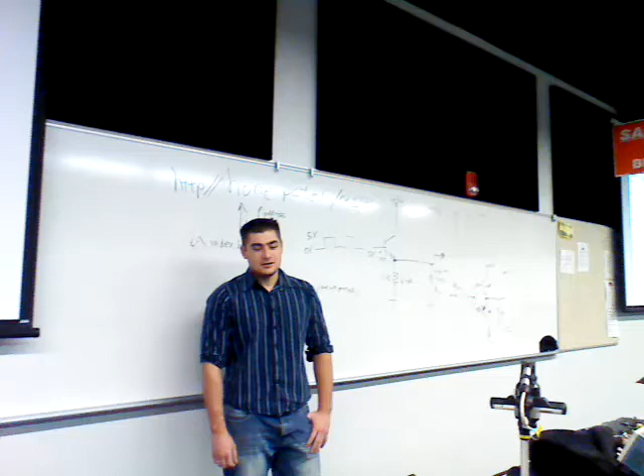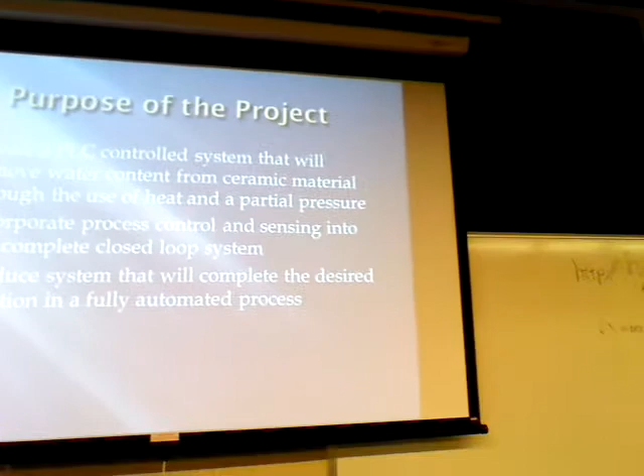For my project, I'm doing thermal assisted water evaporation using a vacuum. It sounds really complex, but basically it's just a drying oven for ceramics. A lot of processes nowadays are automated, so this takes a wet ceramic product, puts it in this oven, brings it down to a pressure of a vacuum, like a rough vacuum, and removes any content of moisture from it.

What's going to make this project actually relevant to electronics is that I'm going to be doing this whole thing with process control.

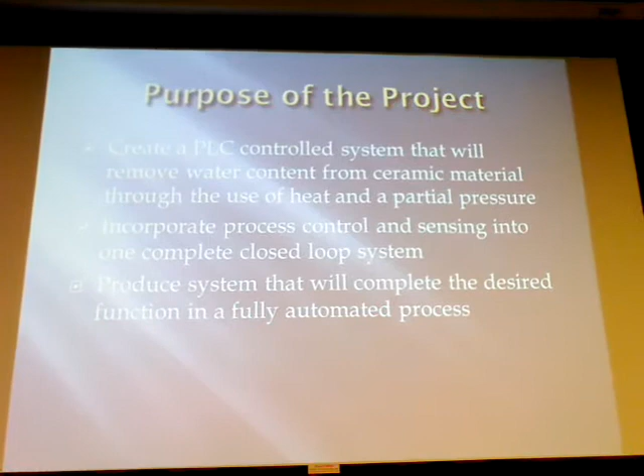Basically, you take the entire system and use what's called a PLC. If you've ever been to a robotics lab, you'll see them everywhere, and they're used a lot nowadays. You program this thing and allow the user to choose set points: I want it to go this hot, I want it to stay on for this long, and I want this much gas to flow in. The user can pick all this from a nice screen called an HMI, Human Machine Interface.

After X amount of hours, days, or weeks, it comes out, and hopefully your product is great.

This is kind of like a block diagram. For those of you who don't know, block diagrams are very helpful for people to visually understand what you're doing. You're going to be doing a lot of these for Mr. West's class.

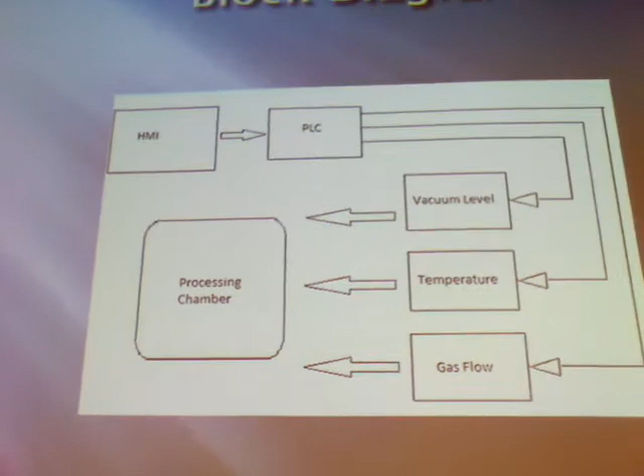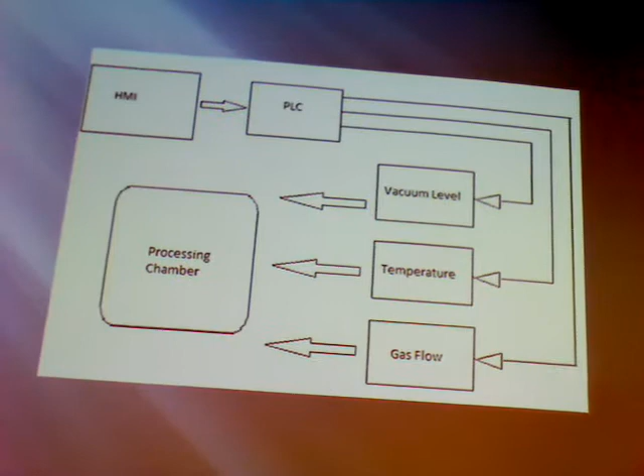Over here, we basically have the HMIs with human interfaces, touchscreen, push buttons, whatever, and then it goes to the PLC. The PLC reads those inputs and makes decisions based on logic inside, then controls those 3 variables: vacuum level, temperature, and gas flow, which all directly impact what's going on inside the process chamber.

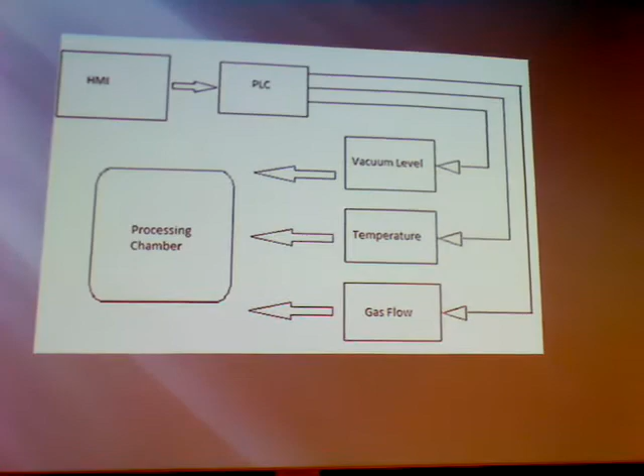So this is all kind of multiple subsystems, but they're all related into one giant thing.

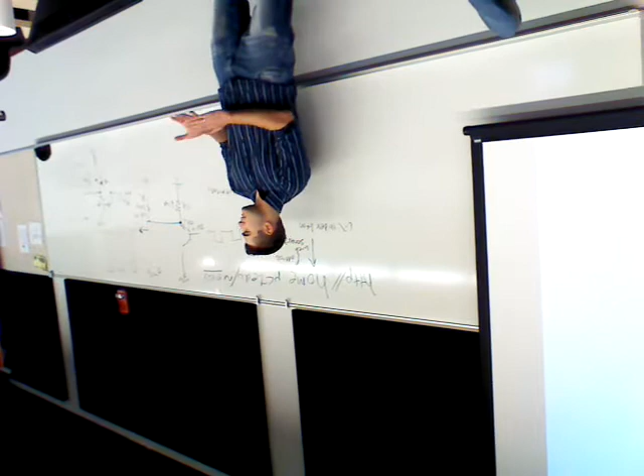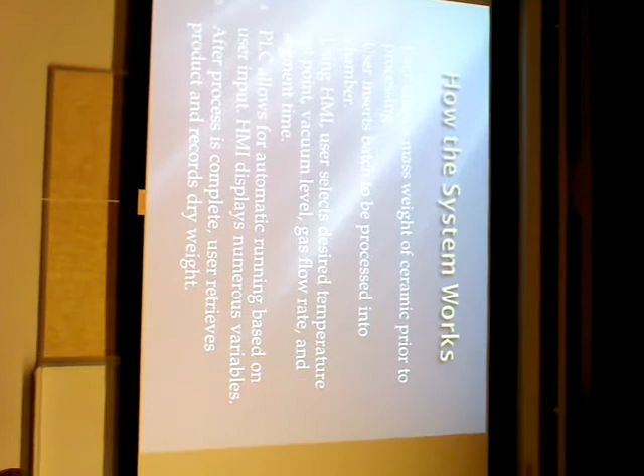So basically how it works: it's set up like, put something in. Then the user selects a recipe, what they want to do with temperature, time, gas flow, ramp rate, that kind of stuff. Then the PLC takes all that data, the user hits start, and it does it.

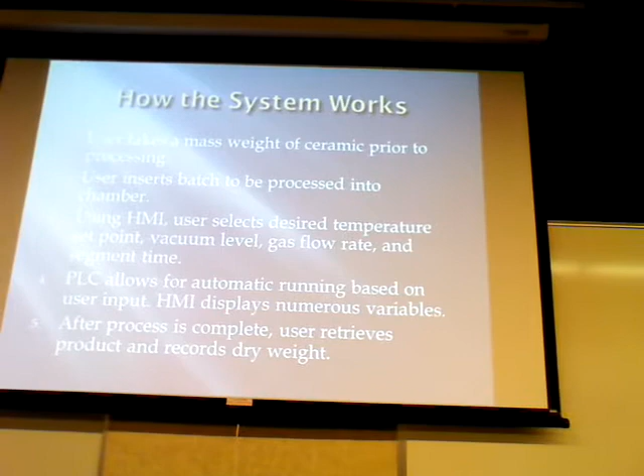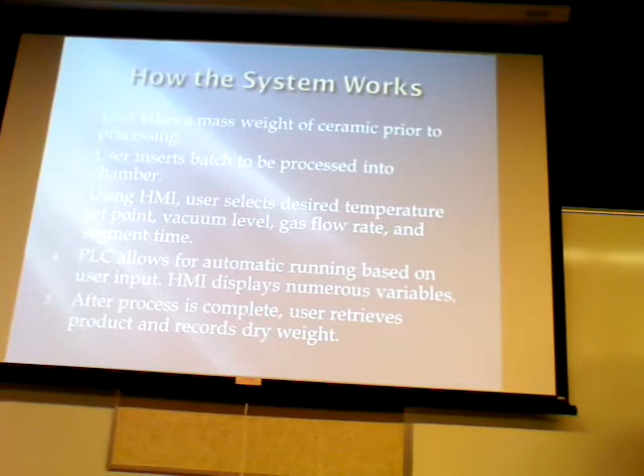After it's complete, the way I check if the water has been taken care of is I take a reading on a mass scale. You can see the weight there, and the released weight was obviously from the water that was in it and is no longer there.

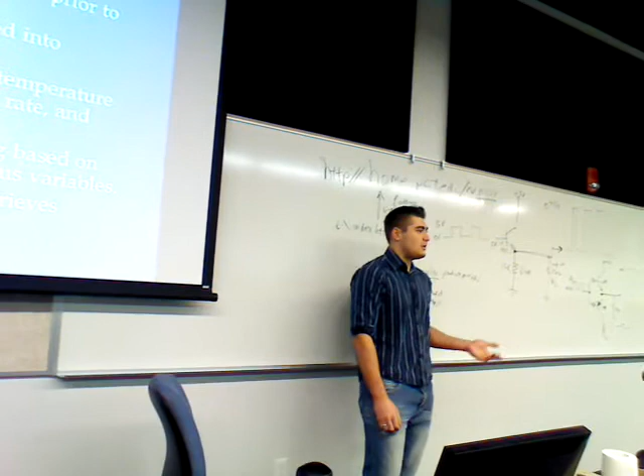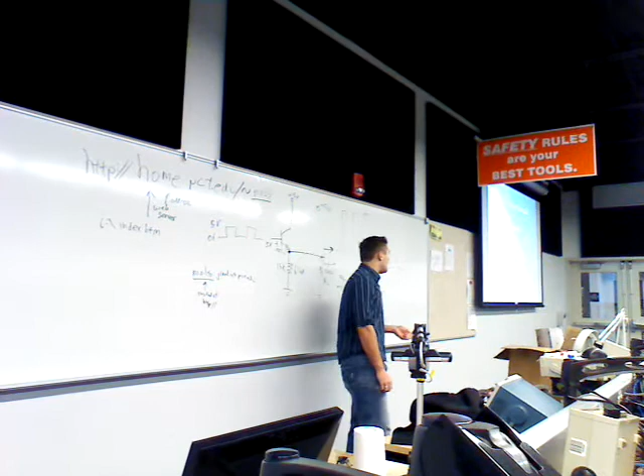I don't know if he's told you about the capstone semester, but it's something you guys kind of got here late for. It used to be a 2-year degree, called nanofabrication. They would send you to Penn State after your first 2 years here, and you would learn how they actually make the physical chips, like microprocessor chips, on substrates. It's very interesting stuff. It deals a lot with vacuum. It's on the nano level, so it's extremely small, and you use a lot of the most modern instrumentation.

You learn a great deal about many fields, like material science, biology, chemistry, and the stuff you learn there really makes you understand how much we can do with our material.

Yeah, you were there 2 summers ago, right? Down at Penn State. Basically they send you there for the summer, you go there, stay in the dorms, and go to their nanofabrication lab. Yeah, a couple of these guys are interested. Hunter, aren't you interested in going? Who else is interested in going to nano?

Yeah, Oliver? I would definitely consider it because not only do you get experience with some of the most scientifically advanced tools available now, like $1 million equipment. You get electron microscopes, you get into clean rooms where there's absolute control of the environment, you know what I mean?

Like a dead skin cell is going to cause something to stop working. It's that sensitive. They put you in suits, you learn safety protocols. The chemistry involved is manageable for someone with our level of experience, but you can learn so much based on that. So it's not something that's really intensive.

You're going to have to apply yourself in terms of book smarts, I guess, because over here we do a lot of hands-on. At the end of the day, when you come to class, it's what you can show. You build a circuit, you evaluate it, you take measurements, that's your grade. Over there, you have to read a lot, regurgitate the knowledge, and do it again for a period of 3 months.

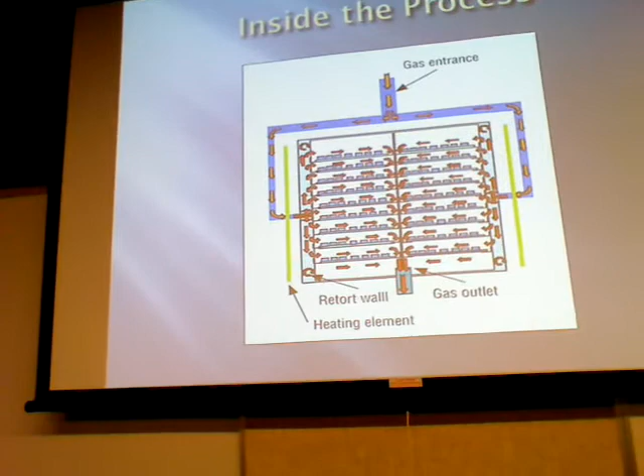Basically, the gas comes in, and what the gas does is it allows for uniform heating. Argon is a noble gas. It's very stable, it doesn't really react with anything.

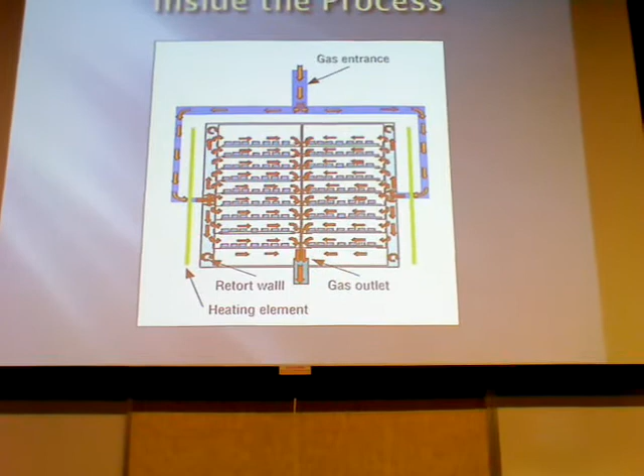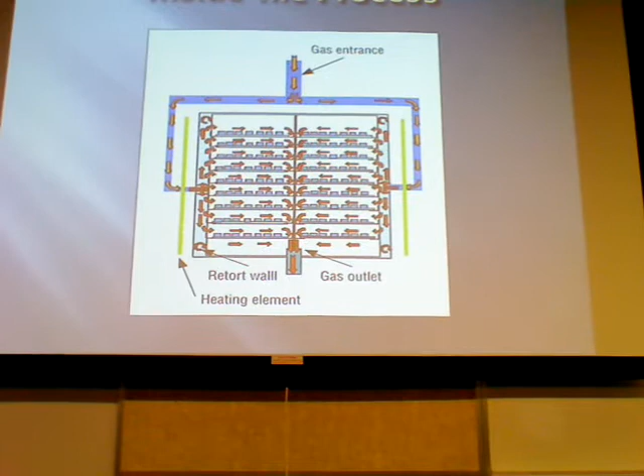When it comes in, it evenly distributes the heat, and also helps agitate some of the water out of the ceramic. So it's going to help speed up the process, and it's also going to be used for cooling at the very end, because it comes out of the tank colder than atmosphere reaches. So it's going to help cool down the chamber so we can get it open faster, and it's safe to handle.

If you guys have any questions about the project or about where you're going to be going the next 4 years... Yeah, so how big is it?

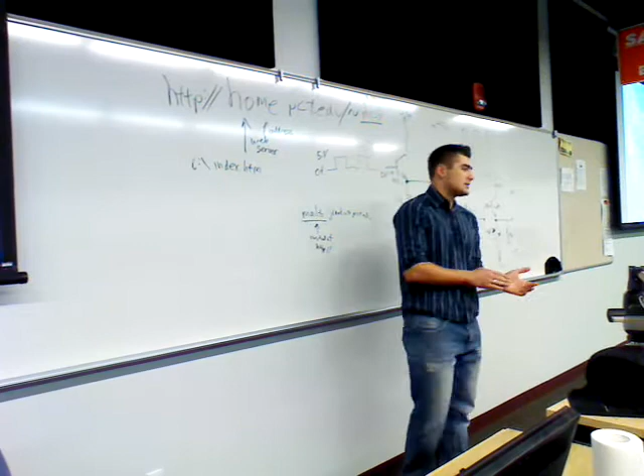It's going to be about the size of this table. The chamber itself is going to be about half, but then you got all the wiring, all the electronics and stuff. There's going to be a PLC board in there, and I'm still debating if I'm going to use an actual PC, or maybe like a touchscreen interface for it.

So it's gonna be like you're building your own oven, basically? Yeah, actually, when I did the 2-year degree, this is what I did for it, but it was a very crude model. It was just, you pressed a couple buttons and it was on and off. There was no automatic cycle, there was no real way to tell what the variables inside were as far as temperature, as far as vacuum level.

Nothing was really there. It was just a very crude on and off kind of deal. And it was great for robotics because you got a taste of everything, very small knowledge in it. But then when you take it to the level of what you learned before, you can see how much more you can advance the system just based on the stuff that you learned.

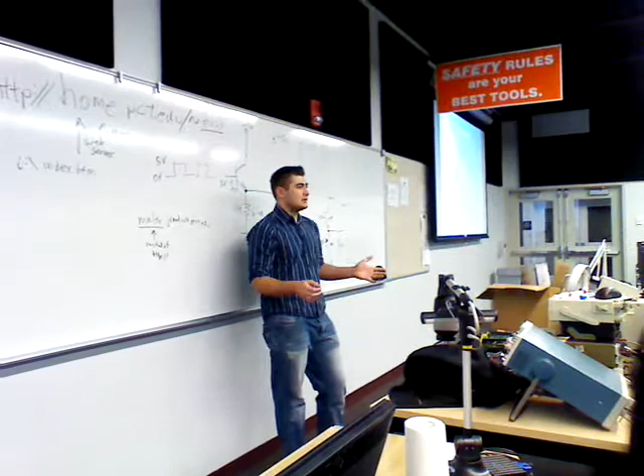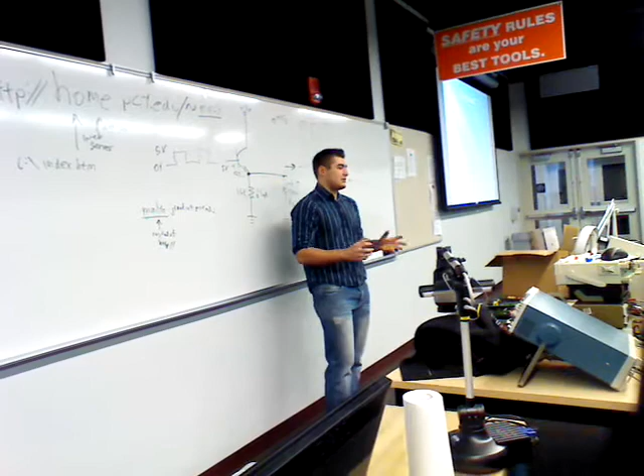In this major, you get a lot of problems. You'll find this out when you take classes that are really heavy for analog systems and linear systems. It's kind of like that class, but you start using extremely complex circuits. They give you circuits and problems that are so difficult that when you get a real problem, it almost seems trivial. You know what I mean?

It's gonna frustrate you, but you understand that these people have been in this business for a long time, and they know what people want to see, and how you're gonna be asked to handle it. You may think that they're busting your balls, that they're giving you a hard time, but honestly, what you learn from these people is going to be with you for the rest of your life.

I've gotten offers from a lot of companies so far, just because of what I learned in the 2-year. And then being able to address the topics I learned in the 4-year just helped me that much more. So you guys are in a good position right now.

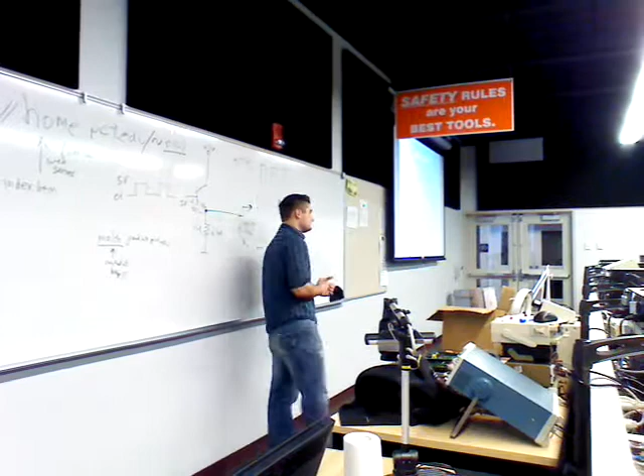This is where you're going to be. If you're sticking to this kind of stuff, you're going to be in a good position. And you have to understand that the guys that are calling the shots for you right now may seem like they're hammering you with it, but it's because they know that if you know what they know when you leave here, you're going to be golden.